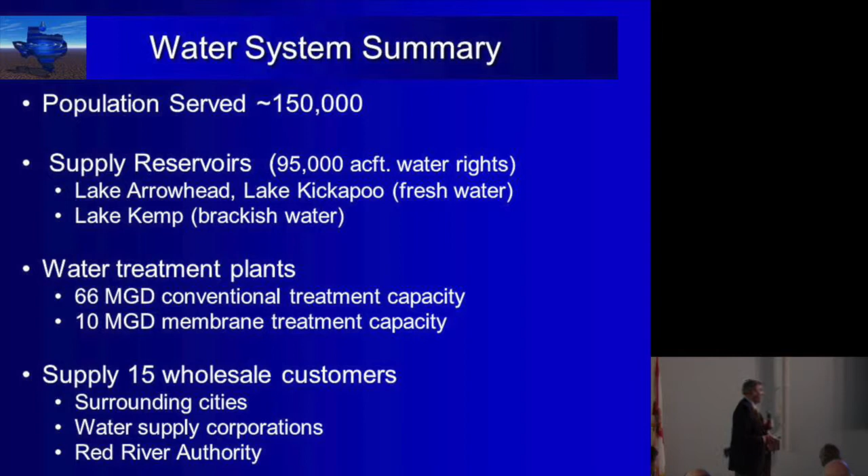And we also have Lake Kemp, which is a brackish lake. There's salt water that seeps up out of the ground about 90 miles west of Wichita Falls, and that water winds up in Lake Kemp. So to treat that water, we have to have a microfiltration reverse osmosis plant, which we brought online in 2008. 66 MGD of conventional treatment capacity, 10 MGD of membrane treatment capacity. And as I said, we are the regional provider for 15 other wholesale customers.

Well, how did we get in the situation we got into? The drought actually started in Texas in October of 2010. We typically averaged 28 days over 100 degrees for the whole year. 2011, we had 100 days over 100. That's over 3 months of over 100 degree temperature. And you know how devastating that can be on surface water supply. Every day in July was over 100, and every day but one in August was over 100 degrees.

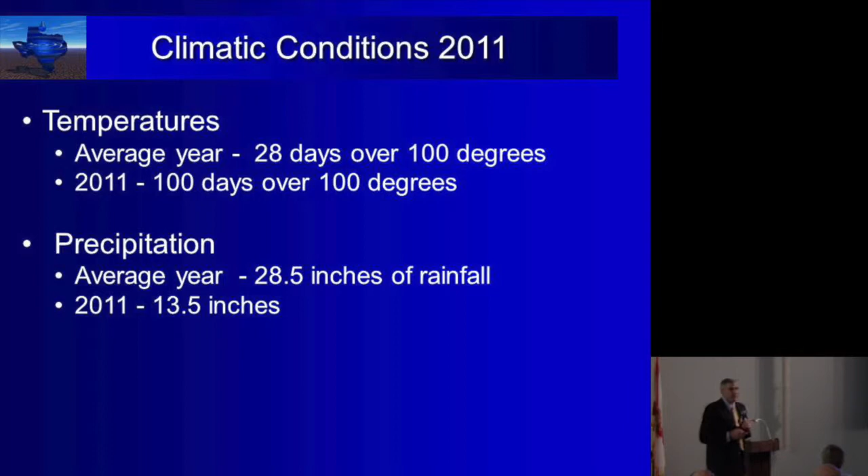You couple that together with low precipitation. 28.5 inches is a typical annual rainfall. We had 13.5 inches of rain in 2011. Thank God our reservoirs were at 97% capacity when that drought started. And by the time we got through with that year, we were sitting somewhere around 50 to 55% capacity in our reservoirs.

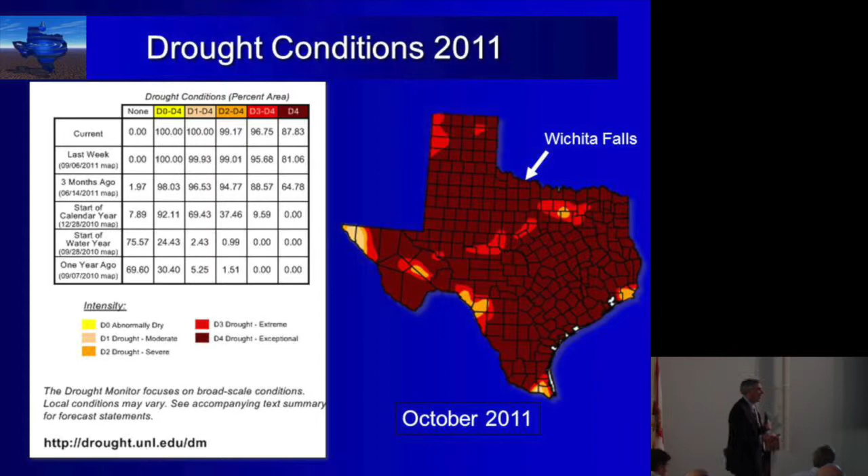This is what Texas looked like in 2011. You'll notice the entire state is in some form of a drought, and almost 88% of it was an exceptional drought. The drought improved over the next 2 to 3 years, but right up there where Wichita Falls is, that little 2 or 3 county area was an exceptional drought all the way up until May of 2015. We never caught a break. The rest of the state came out of the drought some, but we never did.

So what do you do if you're on surface water? When you have a drought, you implement your water conservation drought contingency plan, which we did. And this is just a timeline of it. The important thing to note here is we were 1,395 days of water restrictions. 3 years and 300 days before we came out of water restrictions in Wichita Falls.

And I tell you all this because I want you to get a feel for what our residents and wholesale customers are going through. Because if you understand that, you can better understand how we're able to implement a DPR project.

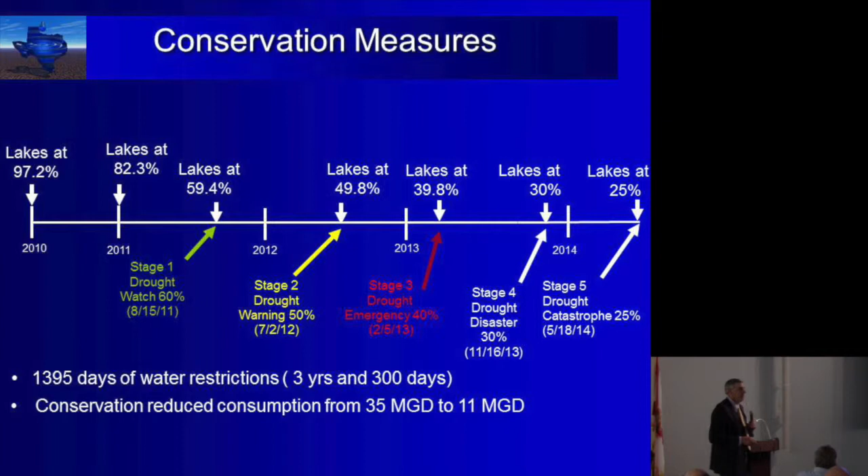Conservation took our normal everyday consumption from 35 MGD down to 11. That's pretty draconian water restrictions right there. So what did we do? We knew we couldn't conserve our way out of a drought, especially a new drought of record. Nobody knows how long the drought's going to last, but we knew 2011 was a monster. It was a bear. It was brutal, I'm telling you. It felt like we were living in an oven.

So in 2012, staff internally, we began to revive an old reuse concept that had started back in '99 and 2000 during the last drought in Texas. We met with the Texas Commission on Environmental Quality, and in Texas, you guys have the DEP down here, it's the TCEQ in Texas. And we learned that they've come up with these new definitions for reuse, direct potable and indirect potable. And I think Dr. Stanford explained the difference between the two, and the same thing applies in Texas, except that indirect potable reuse has been going on in Texas for centuries.

We as cities treat our wastewater, we discharge it into a river, it runs down the river, and someone picks it up downstream and uses it for drinking water. It's been going on for centuries. And now all of a sudden it's got a fancy new term called IPR. And guess what? Now there's new regulations for you to use that water.

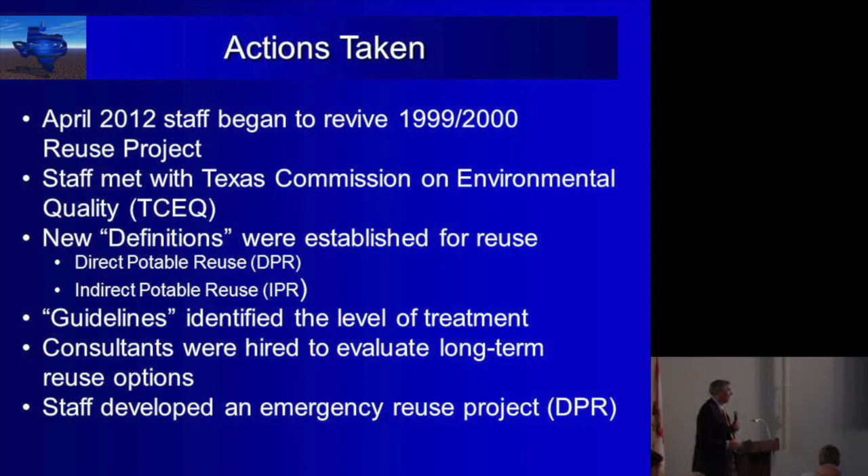So anyway, we were able to identify the treatment levels which the TCEQ expected us to meet if we went DPR. We hired a consultant to evaluate a long-term supply, and internally, myself and my staff developed our emergency DPR project to get us through the drought.

We had done a lot of testing of our River Road wastewater effluent for non-regulated contaminants and numerous other regulated contaminants. And what we found was our actual effluent, once it was through the wastewater treatment plant, met all 97 drinking water standards in Texas. It was almost drinking water when it was leaving the wastewater plant. The only thing we couldn't meet was the nitrates, trihalomethanes, and obviously the microbes, the Giardia and Cryptosporidium. But we knew we could remove that through the water treatment process.

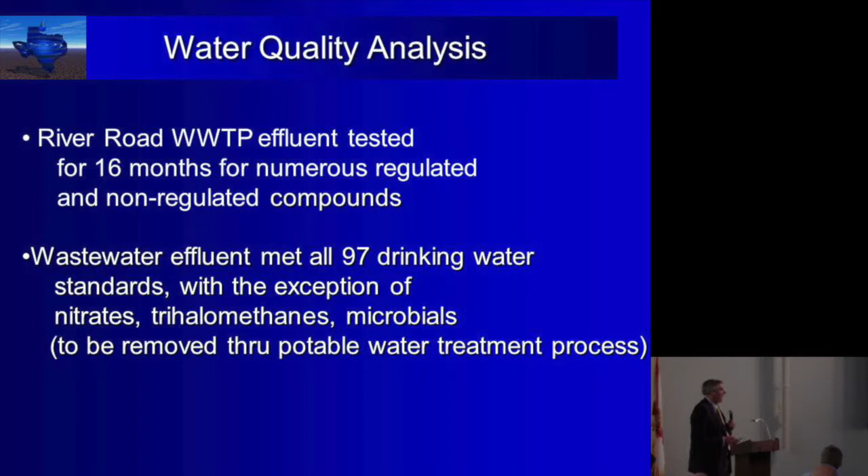We knew Big Spring had already done it on a lot smaller scale in Texas, and we knew about Namibia, Africa, where they were already doing it. So we didn't have any trouble understanding and knowing that we had the right treatment systems in Wichita Falls. So we compiled an engineering report, basically described the project. We would build a temporary pump station and pipeline.

We would convey 7.5 MGD of highly treated effluent from the RRWWTP, the River Road Wastewater Treatment Plant, to our microfiltration reverse osmosis plant located at the Cypress Treatment Facility. We would treat the effluent through both membrane processes. We would then blend it on a 1-to-1 basis with raw lake water, treat the blended water one more time by conventional treatment. And the engineering report also summarized each level of treatment through each process, so many log removal for sedimentation, so many log removal for microfiltration.

It set up the monitoring system, the standard operating procedures, the alarms, the shutdowns. All that you heard Dr. Stanford talk about this morning was incorporated in our preliminary engineering report. He got a lot of that information from TCEQ; it was all about our project. The testing frequency and that type of stuff.

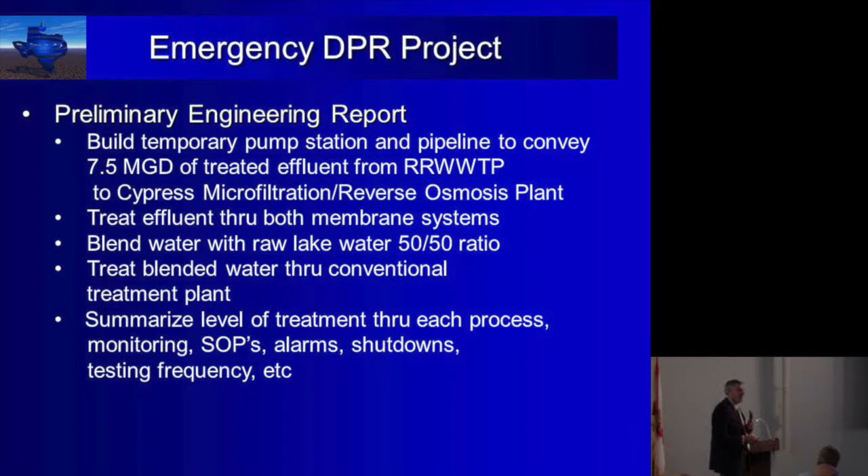This is a schematic of the treatment process. At the top is the River Road wastewater treatment. We splashed a little chlorine in there, and we wound up adding some ammonia as well for chloramines. Goes through the MF, break tank, RO, UV. This is kind of interesting.

We operated for the first 6 months without UV. We were approved to operate without UV, but the condition of the approval was if you operate longer than 6 months, you're no longer considered a temporary DPR project. You're going to be considered permanent. So we had to install UV at another $1 million. But the first 6 months without the UV, the water was perfectly fine.

It goes into the lagoon. We then blend it with our water from our reservoirs, and here's the conventional treatment process, and then into the distribution system.

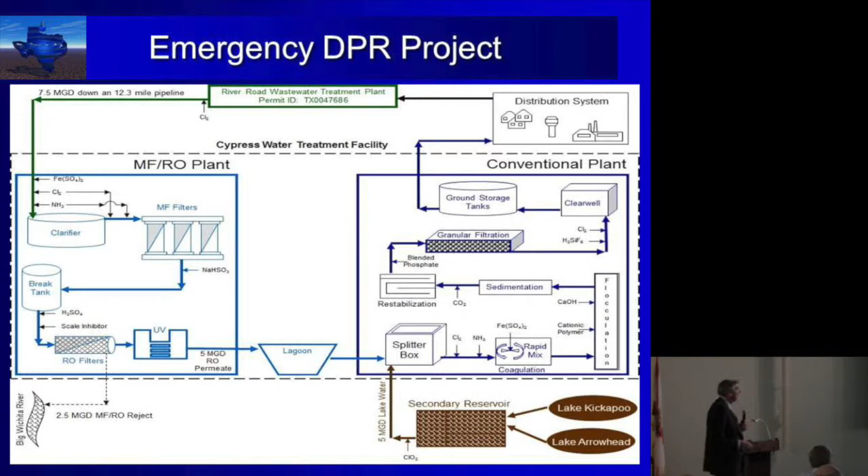This is the route of the pipeline. It was 12.3 miles. And I don't know about Florida, but in Texas, it always seems like your wastewater treatment plant is on the opposite side of the city from your water treatment plant.

But we were fortunate in the fact that we knew the DPR was temporary, and we had always planned on it being temporary. So we actually installed the pipeline on top of the ground because we intended to repurpose that pipeline for our IPR project, after we got our permit and the right-of-way and all that design done.

We were fortunate that we have a large drainage system called Holliday Creek that basically comes from here all the way to Lake Wichita, which is a small recreational lake. And then there's this drainage channel that runs up behind the dam and around to Cypress. We already owned all that right-of-way. So we were able to take the pipeline and just lay it in the bottom of this deep creek, strapped it down, tied it off, and we were able to connect the two plants.

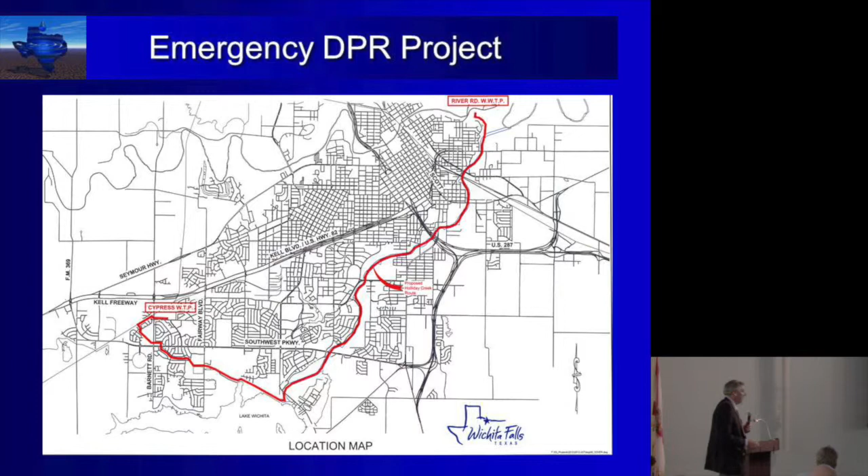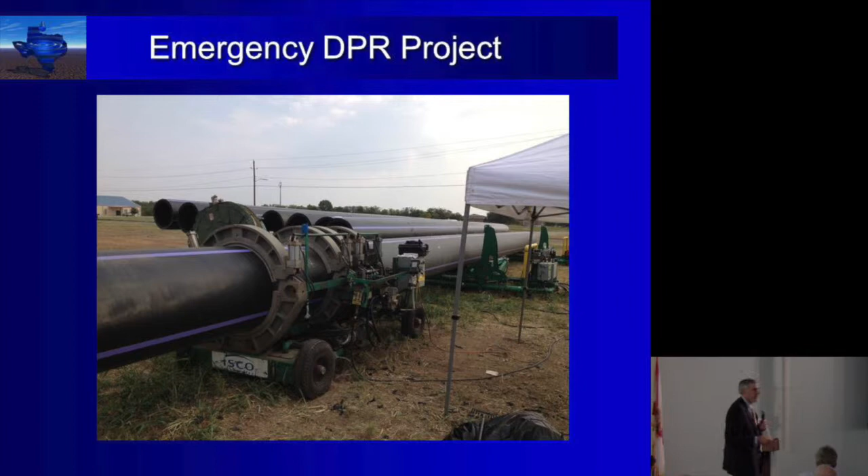This is some of the HDPE pipe. This is the fusing process. All you engineers will notice that's way too large a pipe for 7 MGD. It's a 32-inch diameter pipe, but as I said, we wanted to buy the pipe and repurpose it for the IPR project. So the overall project cost us about $9.5 million, but $6 million of that is pipe that we intend to recover, and we have recovered. So in essence, our DPR project only cost us $3.5 million.

This is the chlorine contact basin at the River Road wastewater plant here. Here's the temporary pumps. Yeah, it snows in Wichita Falls a little bit. There's a little snow on the ground there. But we picked it up there. This pump had a VFD drive on it. This is just a backup diesel pump that was there in case of an emergency.

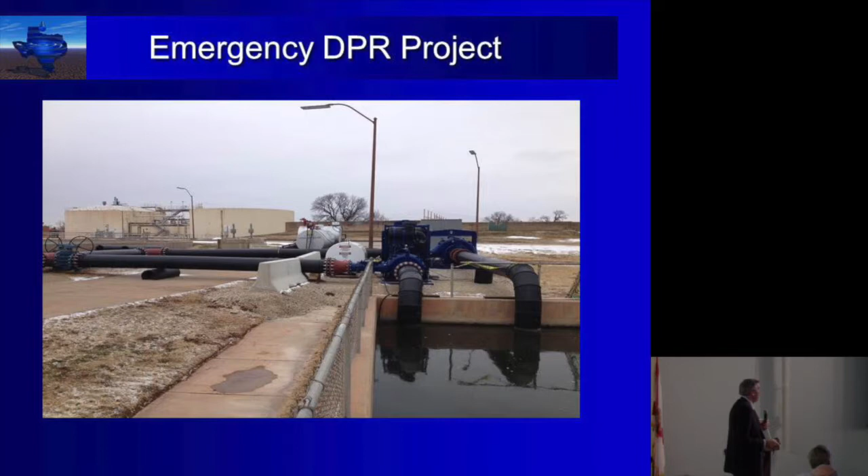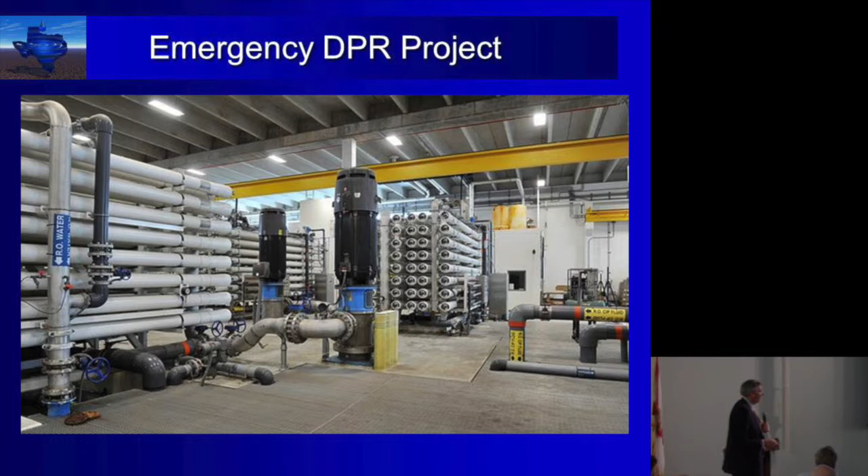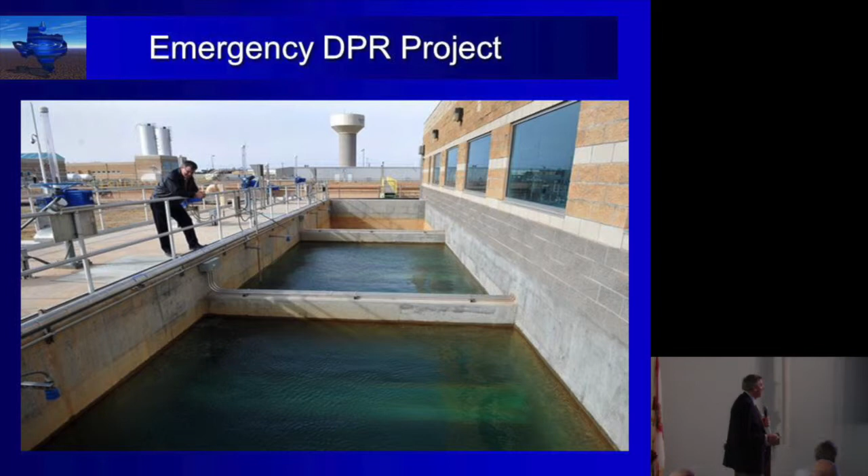So in summary, we began construction of our DPR project in August of 2013. And we began 75 days of full-scale verification testing in January of 2014. We allowed 6 months to lay the pipe, but we did it in 3 because it wasn't raining. So we were fortunate. 75 days of full-scale verification where we monitored and tested the water at 42 different locations at different frequencies for different constituents throughout the treatment process.

We compiled the data. It was a 6,000-page report of data that we submitted to TCEQ, and then we received approval for utilization in June of 2014 and began pumping the water into the distribution system July of 2014. It added 5 MGD of supply, which basically, if you recall, our demand was already at 11, so replacing half of that with DPR water basically supplied half of our demand.

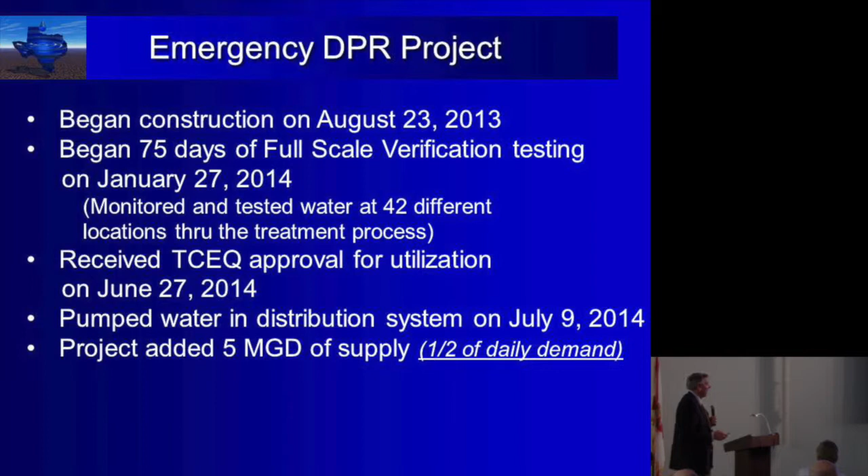The DPR water and the conservation efforts reduced the demand on our reservoirs by 80% during the drought. But people were feeling the drought. So overall, we operated for a little over a year and conserved 1.8 billion gallons of water. We had no public protest or complaints, and general acceptance of the water.

When we stopped, we actually had people complain about the water because we stopped using the DPR. They liked the water that much. The water quality was that good that they could taste the difference. They could taste the salt was gone. And the reason we were so successful, I think, is because early on we engaged all the media outlets. We're a pretty small market in North Texas. We're the biggest town in North Texas between Dallas-Fort Worth and Oklahoma City.

So we were able to engage the radio stations, the TV stations, the newspapers. We have our own cable channel, all of our Facebook, Twitter, all that stuff. We engaged those media, and they supported us. And early on, we engaged the medical and the educational profession. We have a small college in Wichita Falls, and we engaged the county health board, healthcare coalition. We engaged an infectious disease specialist, professor of chemistry, geosciences.

We took a lot of these folks with us on a tour before we ever started. Took them to the headworks of the wastewater plant. And we walked up there, and I thought, this was a bad idea. I mean, you have doctors dressed kind of like me, they're dressed up. And you know how bad a headworks smells at a wastewater plant.

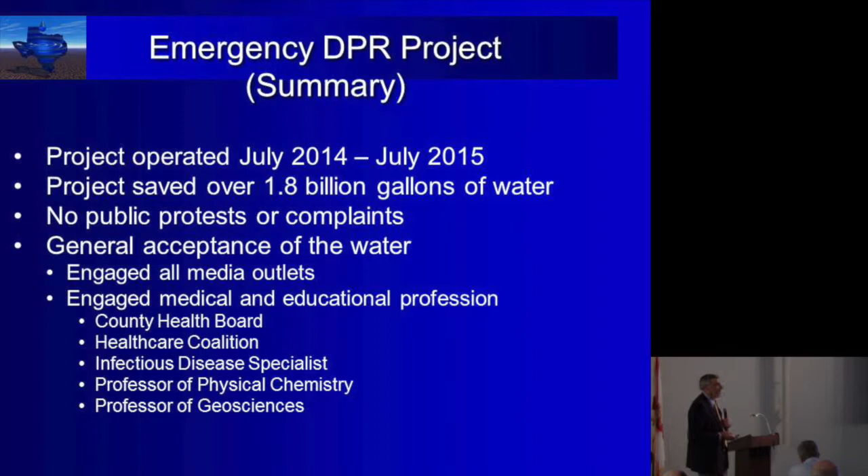So, our long-term plan is to implement an IPR project. In Texas, that requires a discharge permit, which we already have approved. It requires some improvements to the River Road wastewater treatment plant. We're going to add some filtration. We're going to add some nutrient removal at the wastewater treatment plant. And then it obviously requires construction of a pipeline and pump station. For all these reasons, we didn't do IPR to start with. We knew it would take too long.

Our projections for water, well, we were going to be out of water in 24 months in 2012. We didn't have time, but we knew we could implement. We had the treatment processes in for DPR. All we had to do was get the water to the treatment plant. We knew we could do that. So this is our long-term water supply plan. Both projects have been bid. We expect them to be completed in about 24 months, January of 2018. And it will add 8 to 16 MGD of supply.

Our treatment plant right now, wastewater flows are averaging about 9.5 to 10 MGD. Well, we were only permitted for 5 MGD at the DPR. And obviously you lose a lot of that water through your treatment process. You lose 25 to 30% through MF and RO. With IPR, we can capture the entire flow.

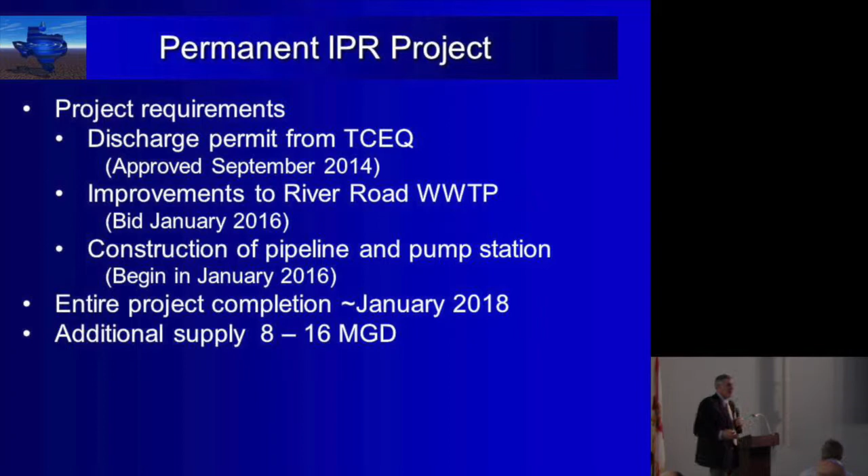Long term, and in conclusion, obviously, DPR was our short-term emergency supply. Worked great for us. It sustained the city through the new drought of record. And for our intermediate supply plan, we intend to develop the IPR project, which we think will be online in the next 18 to 24 months. And then we're also looking at possibly constructing a new surface water reservoir in the North Texas area. And there is some groundwater outside of our area, but quite frankly, it's 200 to 300 miles from us. And it would just be too costly to try to bring that water into Wichita Falls.